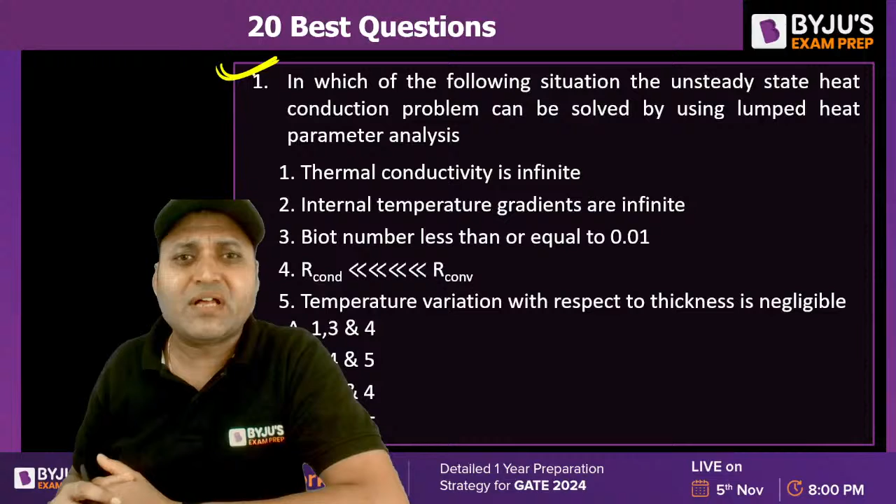All right, so there is the first question on the screen. Can you just let me know the answer to this question? In which of the following situations can the unsteady state heat conduction problem be solved by using the lumped heat parameter analysis? When can we assume the unsteady state heat conduction as a lumped system?

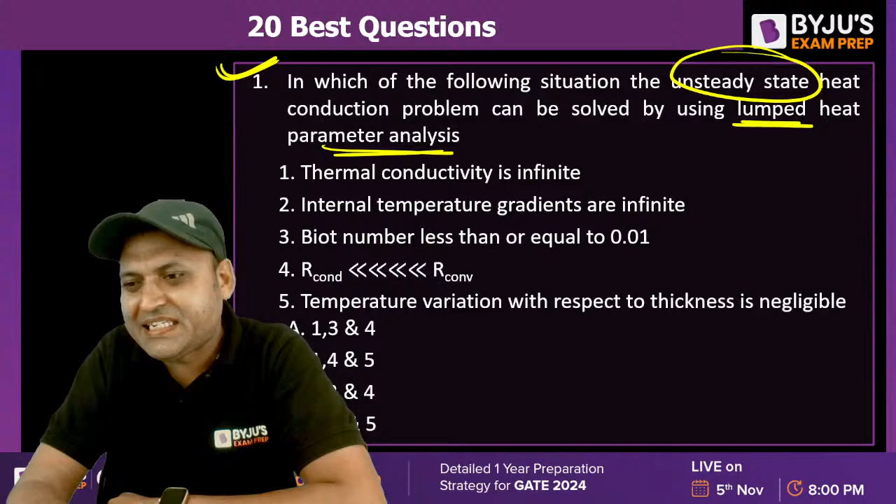So there are 5 statements. Which of the following statements are correct? Thermal conductivity is infinite. For the lumped system to be valid, K is infinite and H is finite. Very true, isn't it? Statement 1 is correct. K is infinite and H is finite.

What about the internal temperature gradients are infinite? That is incorrect, because dT by dx must be 0. Temperature should not be a function of space. Only then, what is the meaning of lumped analysis? Temperature is a function of time only. Temperature is not a function of space. So if the temperature is independent of space, the temperature gradient must be 0.

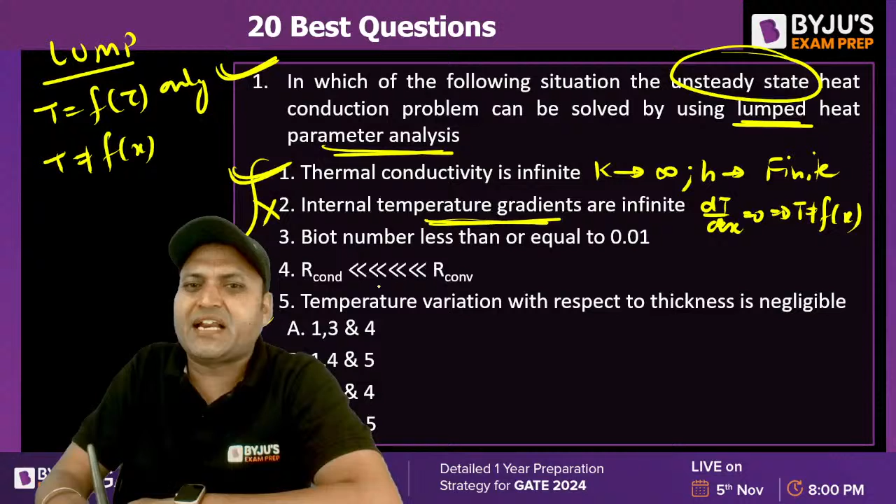So 2 is incorrect. Biot number should be less than or equal to 0.01. To be more specific, R conduction is less than or equal to 1/10 of the convective thermal resistance. So the Biot number should be less than 0.1, not 0.01. So statement 3 is also incorrect.

What about 4? Conductive thermal resistance should be less than the convective thermal resistance. 4 is correct. The temperature variation with respect to the thickness is negligible. Yes, temperature is not a function of X. 5th is also correct. So 1, 4, 5 are the correct answer.

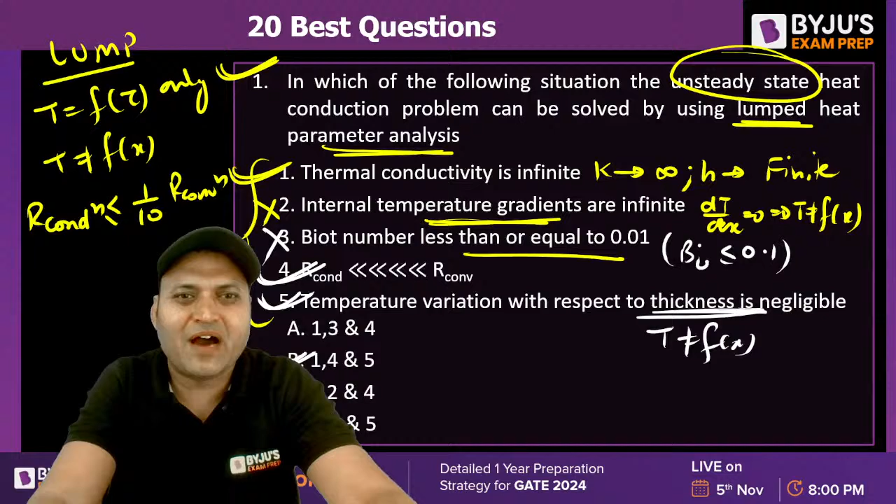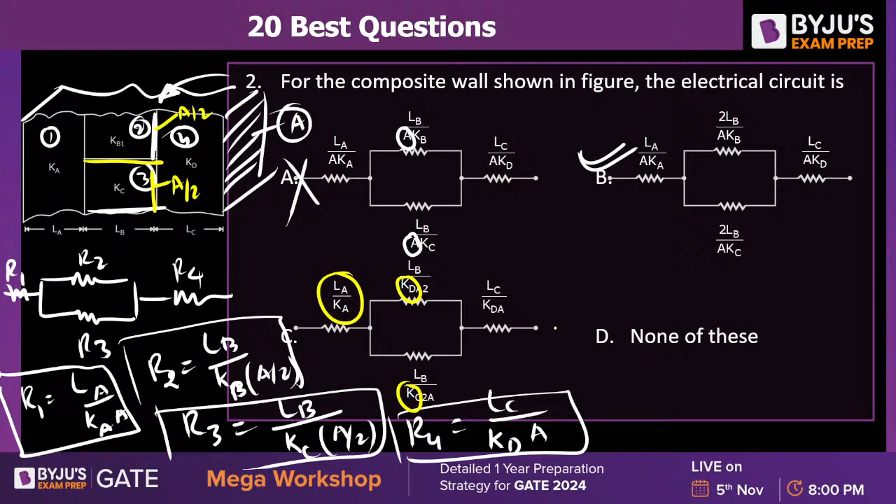If we see option C, L by K is not the thermal resistance. Area is missing. And here the thermal conductivity is not correct. KD will not be there. So option B is the right answer.

What about the next question? The Nusselt number is related to the Reynolds number in laminar and turbulent flow respectively. For external flow, what is external flow? Flow over a surface, flow over a flat plate. External flow can be divided into two types. External flow is analyzed by boundary layer theory. For laminar boundary layer, Reynolds number should be less than 5 into 10 to the power 5.

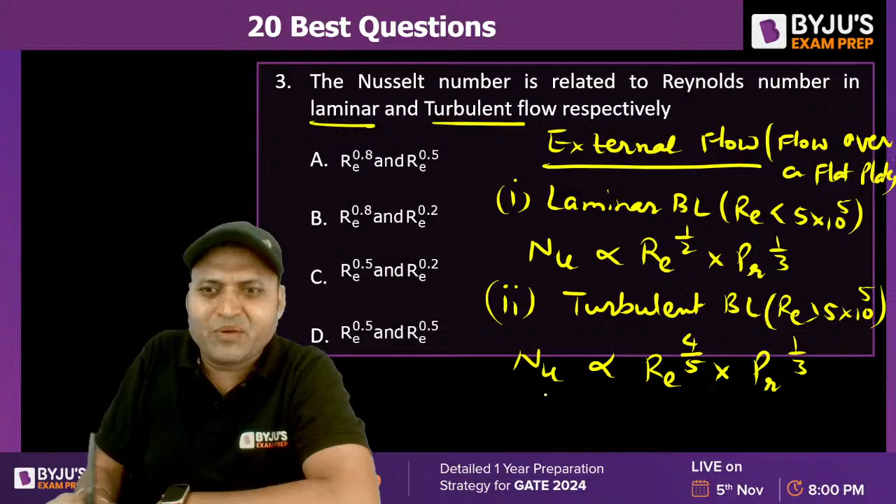In that case, Nusselt number is directly proportional to Reynolds number to the power 1/2 into Prandtl number to the power 1/3. And for turbulent boundary layer or turbulent flow, when the Reynolds number is greater than 5 into 10 to the power 5, Nusselt number is proportional to Reynolds number to the power 4/5 into Prandtl number to the power 1/3. So the question is about the variation of Nusselt number with Reynolds number. What is the right answer?

Tell me. Reynolds number to the power 0.5 for laminar boundary layer and Reynolds number to the power 0.8. 0.5 and 0.8. No option is correct. I think there is a mistake. It should be 0.8 here. 0.5 and 0.8. Which is the correct answer? What is the answer? Option D. D will be the answer. D is the correct answer.

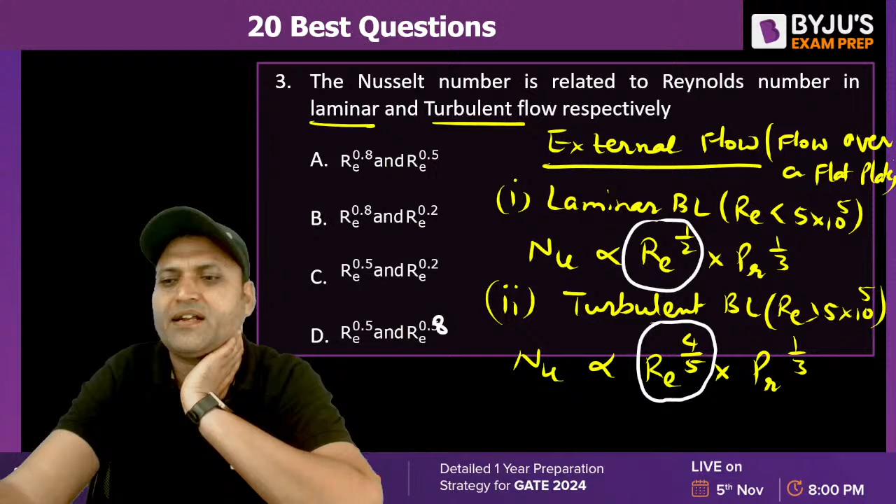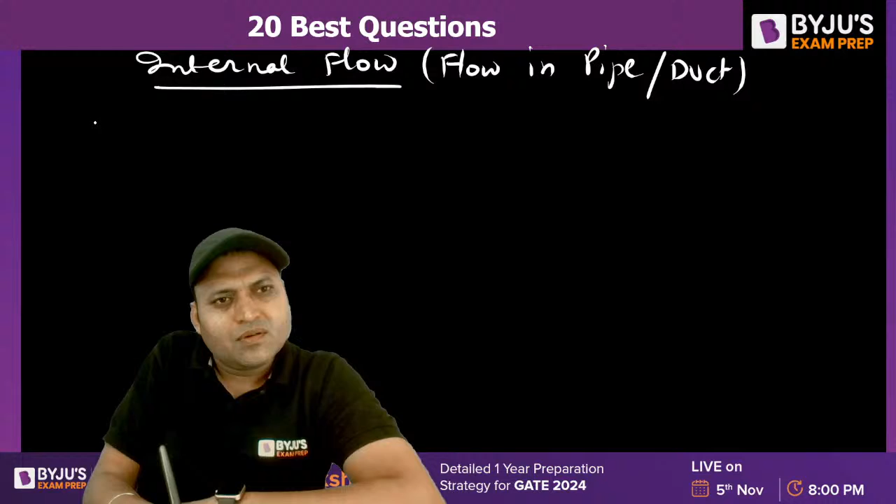If the flow would have been internal, for internal flow in a pipe or a duct, it can be divided as laminar or turbulent. For laminar flow, Nusselt number, that is h into dH by kf, is equal to constant. The value of constant can be 4.36 or 3.66. If heat flux is constant, it will be 4.36. And if the surface temperature is constant, then it will be 3.66.

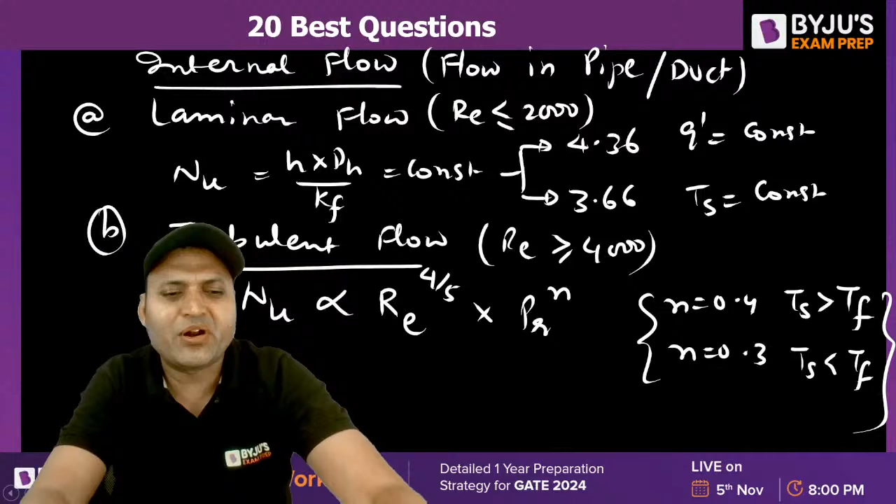Laminar flow is when the Reynolds number is less than 2000. For turbulent flow, Reynolds number should be greater than 4000. So the Nusselt number is proportional to Reynolds number to the power 4 by 5 into Prandtl number to the power n, and n is equal to 0.4 if Ts is greater than fluid temperature, n is equal to 0.3 if Ts is less than fluid temperature. These are the formulas you need to memorize for internal flow. All right.

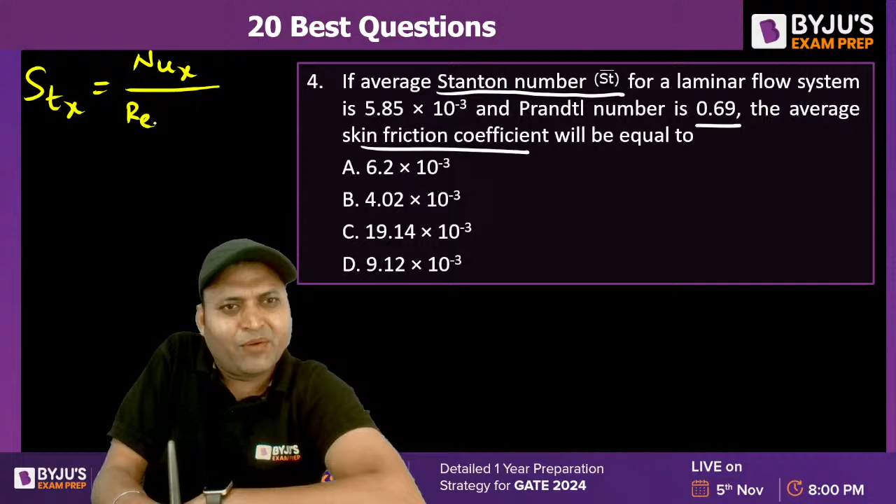The next question, question number 4. If average Stanton number for a laminar flow system is given by this, and the Prandtl number is 0.69, the average skin friction coefficient will be equal to? What is Stanton number? Local Stanton number is local Nusselt number divided by local Reynolds number into Prandtl number. For laminar boundary layer, when the Reynolds number is less than 5 into 10 to the power 5, Nusselt number is given by 0.332 into Reynolds number to the power 1 by 2 into Prandtl number to the power 1 by 3. That is the exact expression.

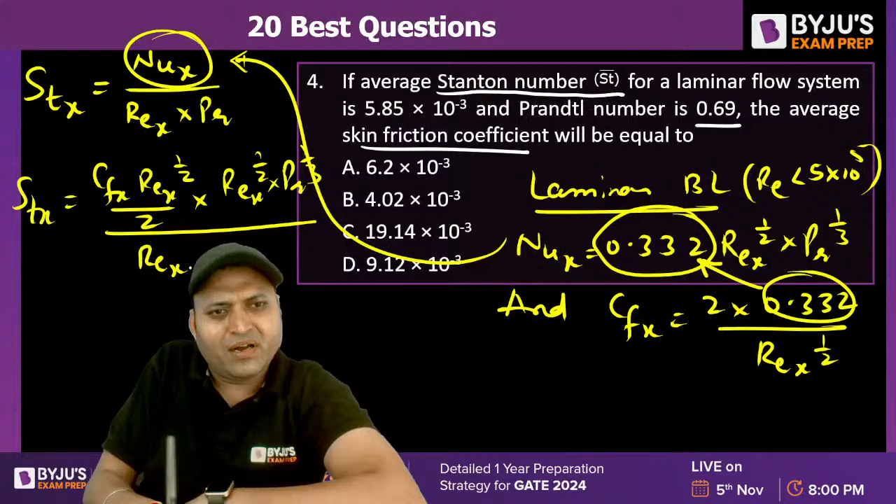And CFx is equal to twice of 0.332 upon Reynolds number to the power 1 by 2. These are the formulas. So if we put the value of Nusselt number from here, then the Stanton number is given by, in place of 0.332, write CFx into Reynolds number to the power 1 by 2 by 2, into Reynolds number to the power 1 by 2 into Prandtl number to the power 1 by 3, upon Reynolds number into Prandtl number. So this Reynolds number to the power 1 by 2 gets cancelled out with the Reynolds number.

So Stanton number is equal to CFx by 2 into Prandtl number to the power minus 2 by 3, or CFx is equal to twice of Stanton number into Prandtl number to the power 2 by 3. This will be the expression. If we want average, we will take Stanton number as average. So it will be 2 into Stanton number average into Prandtl number to the power 2 by 3. That will give you the skin friction coefficient. Can you solve it and do let me know?

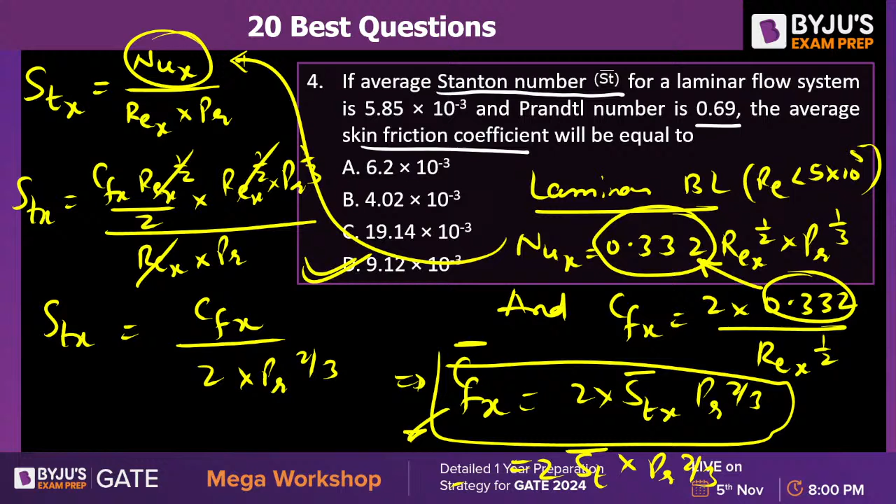What is the answer? Put the values and find out the answer. Isn't it option D? Are you guys getting option D or not? The next one, question number 5. There are 20 questions in total. Try to solve the next one.

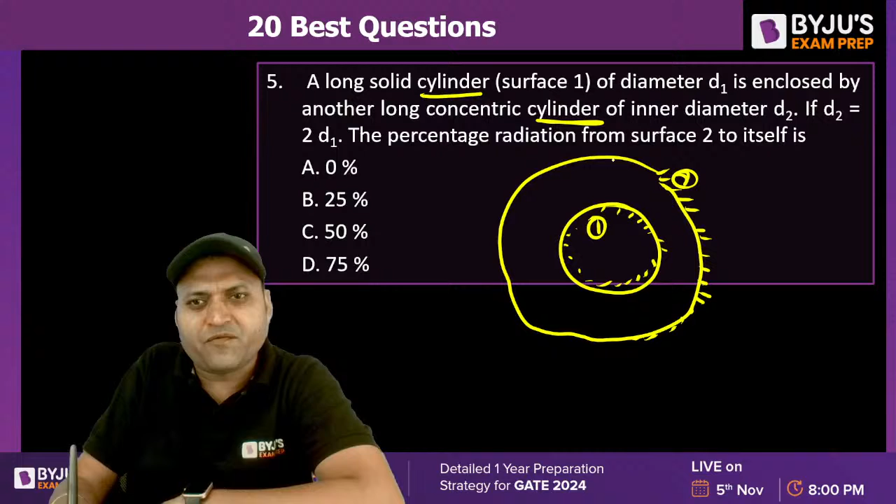A long solid cylinder, surface 1 of diameter D1, is enclosed by another long cylinder. The question is from the radiation shape factor. There is a cylinder inside and another cylinder outside. Let us say it is an enclosure. They are a cylindrical system, concentric cylinders. If D2 is equal to twice of D1, the percent radiation from surface 2 to itself, F22, will be how much?

So from the enclosure theorem, we can say F22 is equal to 1 minus F21, and from the reciprocity theorem, we can write F21 is A1 by A2 into F12. Now we need to find out F12. Also F11 plus F12 is equal to 1 from the enclosure theorem.

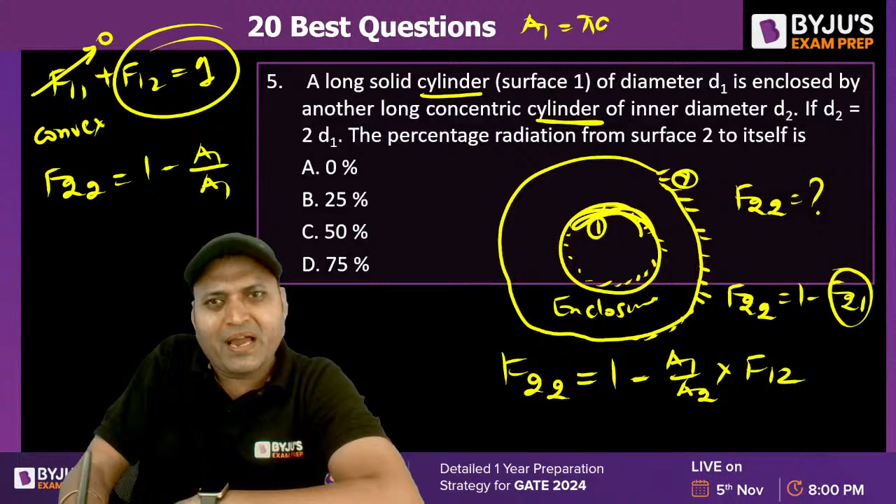Self-shape factor of a convex surface is equal to 0. 1 is the convex surface. For a convex surface, F12 is equal to 1. So F22 will be equal to 1 minus A1 by A2. And what are A1 and A2? A1 is equal to pi into D1L. A2 is equal to pi into D2L. So it will be 1 minus D1 by D2, which will give you the answer 50%. 50% will be the answer, isn't it?

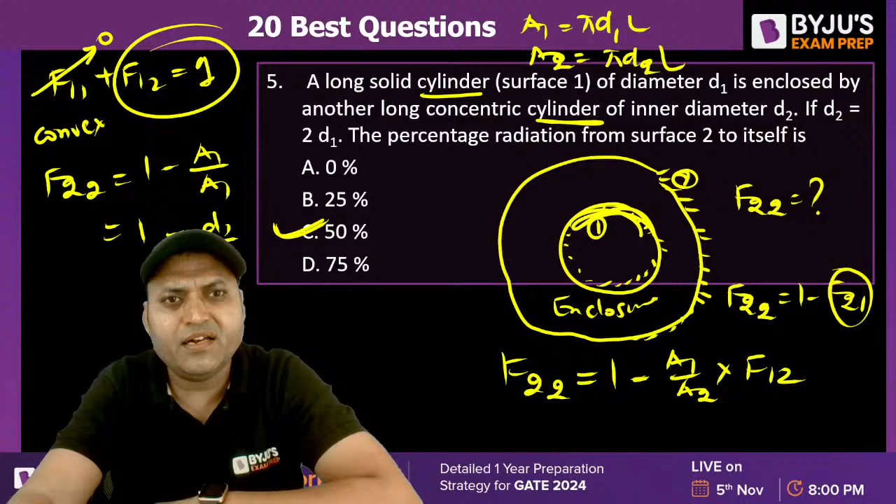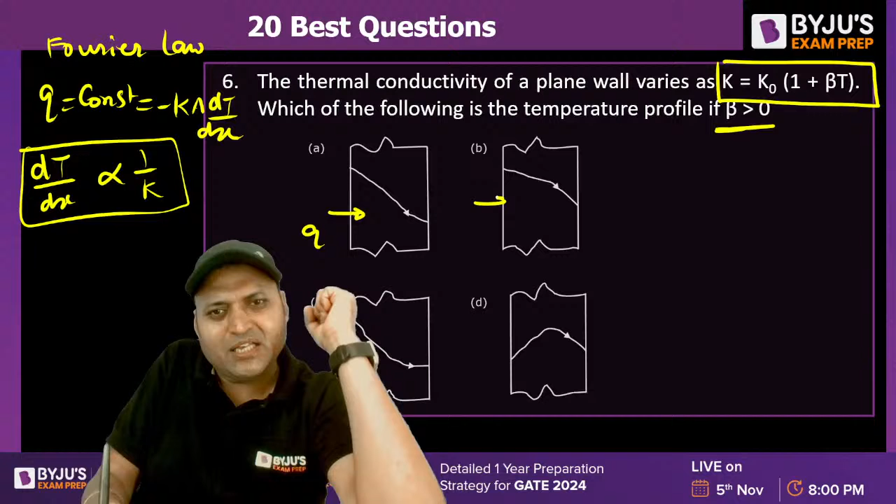And the heat flow is taking place from left to right. Then as x increases, the temperature must decrease, isn't it? And if we use this expression, if beta is positive, then K will also decrease. And if K decreases, dT by dx must increase in the direction of heat flow, and the nature will be negative. So the curve which represents the negative and increasing slope will be the correct answer for the temperature profile, isn't it? So B is the correct answer.

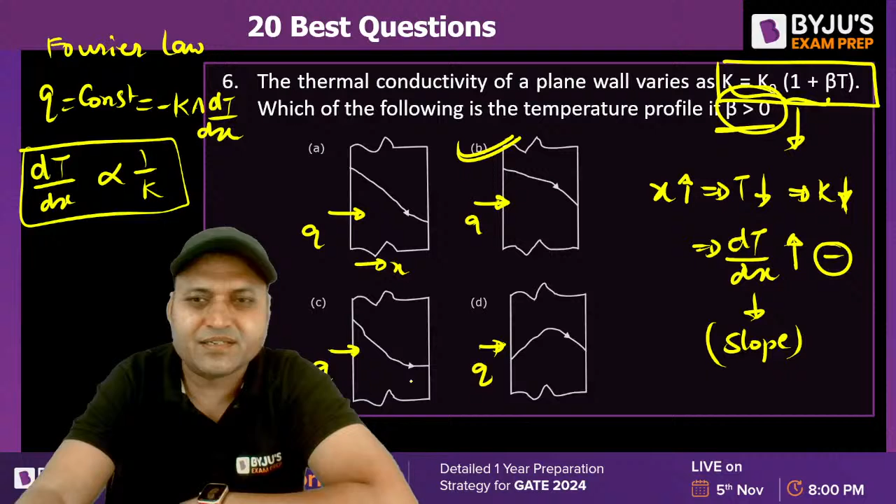So if we draw the temperature profile for a plane wall having constant heat transfer rate and constant temperature difference delta T, then there will be three curves shown. The temperature profile will be linear for constant thermal conductivity, that is, if we take the average thermal conductivity into consideration. The temperature profile will be given by this curve when K is equal to K naught (1 plus beta T), when beta is positive. That happens for gas and insulator: as the temperature increases, the thermal conductivity increases.

And the curve will be given by this graph when K is K naught (1 minus beta T). Again, beta is greater than 0. So this will be valid for liquid and conductor. These are the temperature profiles because dT by dx is always inversely proportional to K. The curve will be developed by using this expression.

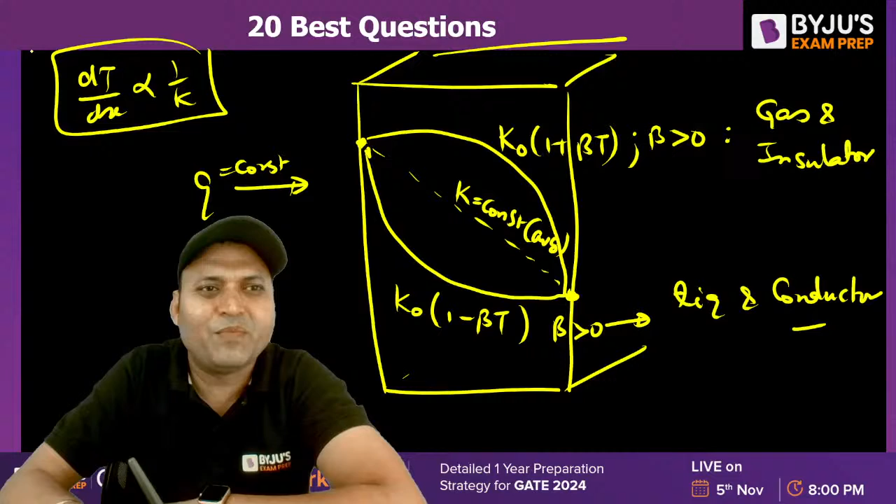Question number 7. A steam condenser. What is a condenser? It means hot fluid is undergoing a phase change. The temperature of the hot fluid remains constant. Condensing steam at 70 degrees Celsius, so the hot fluid temperature TH is 70 degrees Celsius and the temperature profile will be a horizontal line, to have a capacity of 100 kilowatt, that is Q. Water, the cold fluid, at 20 degrees Celsius is used and outlet temperature is limited to 45 degrees Celsius.

If the overall heat transfer coefficient U is 3100, the surface area required is, the question is about A. Assume water heat capacity as minimum. It will definitely be minimum because if there is a phase change, the heat capacity rate for the hot fluid is taken as infinite. Assume the water heat capacity as minimum and use NTU method. In an objective paper, whatever you are comfortable with, you can use if the parameters are sufficient. So first, let us use LMTD approach.

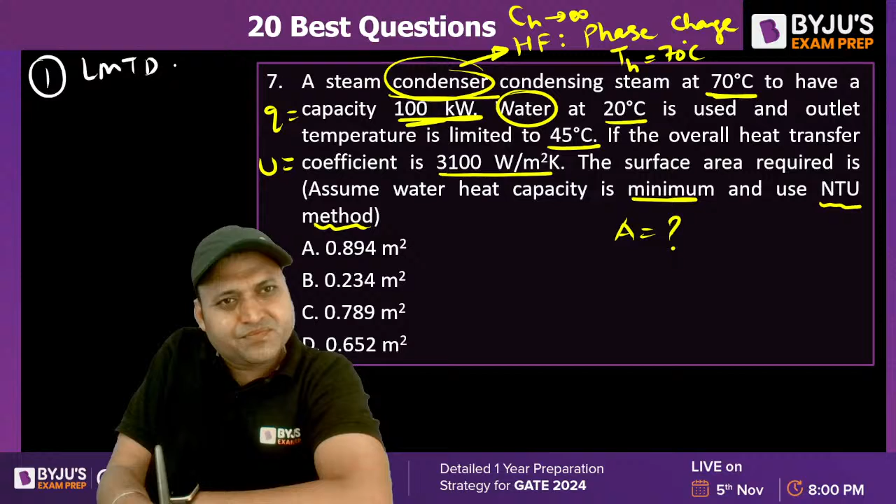And we will check whether we get the same answer or not. So for LMTD, we need to find out the LMTD. You can either use the parallel flow or counter flow heat exchanger; it does not matter at all. The hot fluid temperature remains 70. The cold fluid entry temperature is 20 and the leaving temperature is 45. What is the value of LMTD? This is delta T1. This is delta T2. I want everyone to solve for LMTD first.

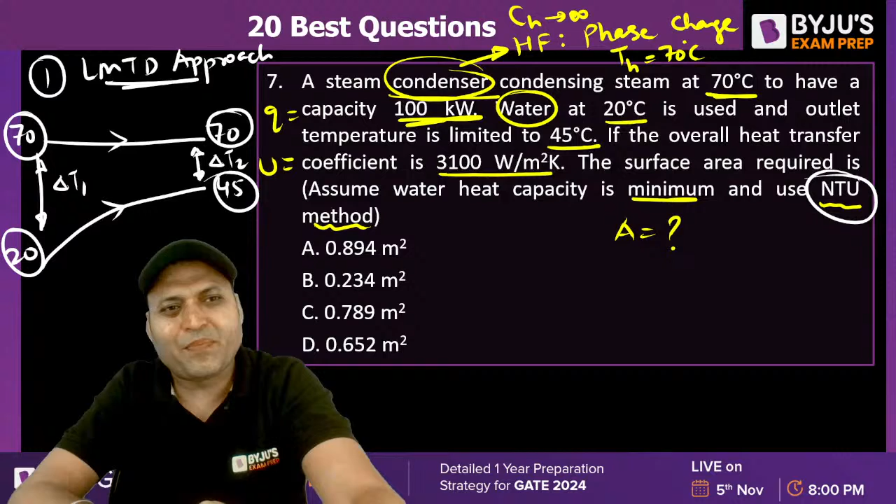I am using the LMTD approach even though it is mentioned to use the NTU approach, because I feel LMTD approach is a little simpler. If all the terminal temperatures are given, as in this question, then we can go with the LMTD approach, isn't it? If any of the temperatures had been missing, then we should have used the other approach. LMTD is delta T1 minus delta T2 upon natural log of delta T1 by delta T2.

Can you find out what is delta T1? 70 minus 20, that is 50, minus what is delta T2? That is 25, upon natural log of 50 by 25. That will give you LMTD. So delta Tm, mean temperature difference between hot fluid and cold fluid, is, what is delta Tm?

Question number 7. What is delta Tm? I think delta Tm should be 36.06 degrees Celsius. Once you get delta Tm, then Q is equal to U into A into delta Tm. So A will be equal to Q upon, what is the heat transfer rate? 100 kilowatt, 100 into 10 to the power 3 upon U. U is 3100 into delta Tm 36.06.

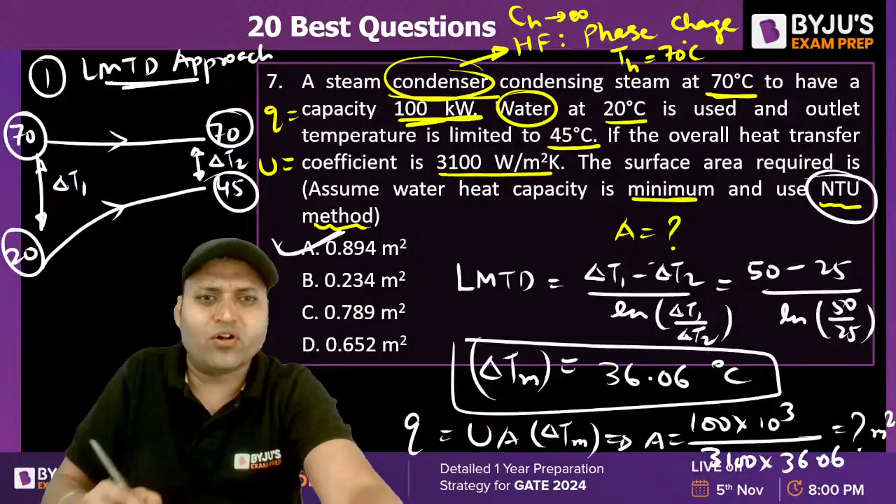Do solve it, you will get area in meter square. What will be the area in meter square? Are you getting option A? Are you guys getting option A or not? Isn't it option A? That is one approach.

If you use the effectiveness NTU approach to find out the area, effectiveness is given by Q upon Q maximum, that is equal to Q upon C minimum into TH1 minus TC1, isn't it?

So Q is already given to you. What is Q? 100 kilowatt. So it will be 100 into 10 to the... CC is not given. Is it given? CC is not given. So what you can do is, because the heat capacity rate for the cold fluid is not given in the question, Q could have been written as CC into TC2 minus TC1. This could have got cancelled out.

That is 45 minus 20 upon TH1, that is 70 minus 20. 45 minus 20 upon 70 minus 20. That is the effectiveness. What is the value for the effectiveness? 0.5. And then because it is a condenser, when there is a phase change, effectiveness is given by 1 minus e to the power minus NTU. So NTU can be calculated from here.

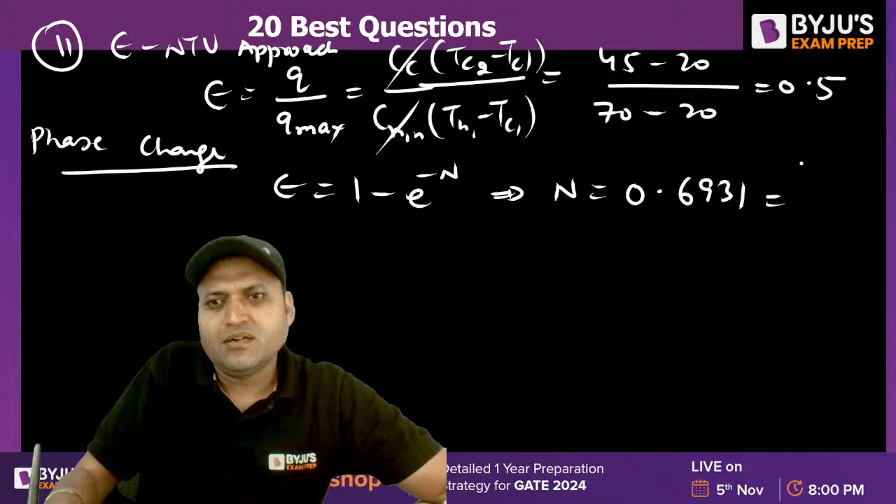Can you find out the value of NTU? NTU will come out to be 0.6931. That is UA by C minimum. Again we require C minimum. That is CC. You could have calculated CC from here. What is CC? Q is equal to CC into TC2 minus TC1.

Q is equal to 100 into 10 to the power 3 is equal to heat capacity rate for the cold fluid into TC2 minus TC1. TC2 is 45 minus 20. Find out the value of CC. That is equal to 4000 watt per Kelvin. That is C minimum. So area will be given by NTU into C minimum upon U. NTU is 0.6931 into C minimum 4000 upon overall heat transfer coefficient, already given as 3100.

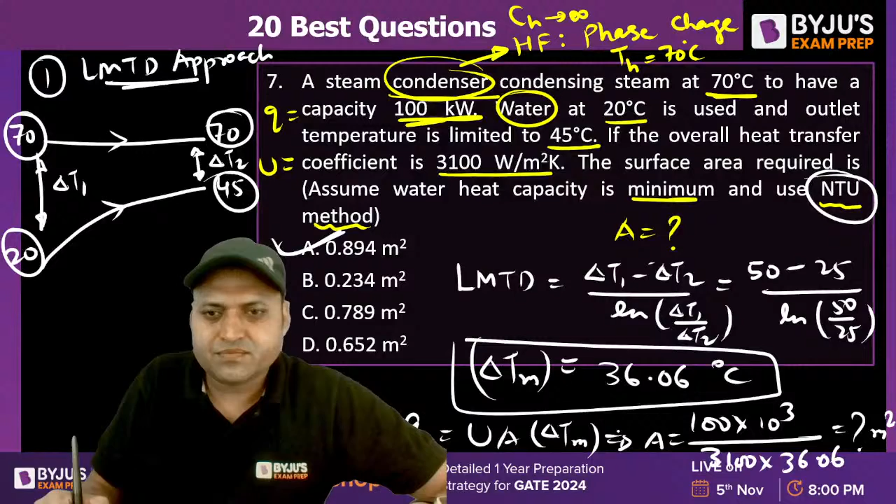That will be the answer in meter square. If you solve this way also, you will get the same result, 0.894. I hope that both the methods are clear to you. Is this clear to everyone? Let us move to the next one, question number 8.

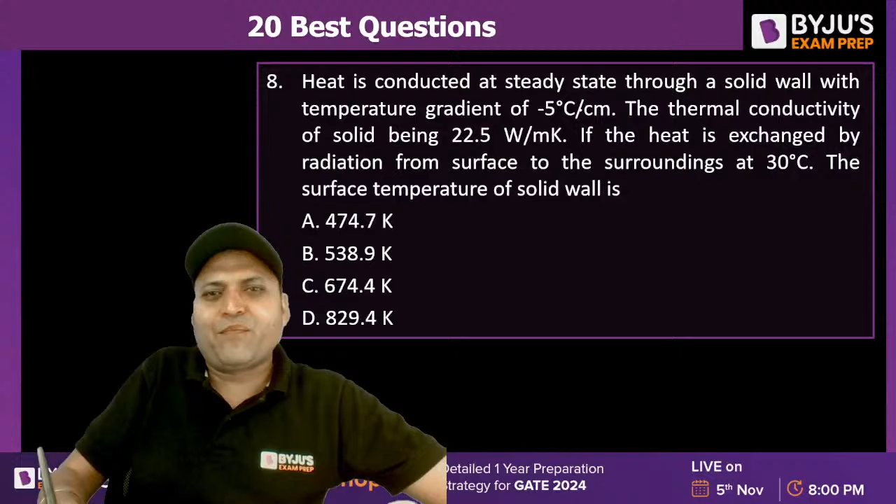Heat is conducted at a steady state through a solid wall with temperature gradient of -5 degrees Celsius per centimeter. The thermal conductivity of the solid being this, thermal conductivity K is given, dT by dx is given, which is negative.

If the heat is exchanged by radiation, there is a conduction here, and the same heat will be radiated from surface to the surrounding at 30 degrees Celsius. Then we need to find out the surface temperature Ts. So conduction should be equal to radiation. For the steady state, Q conduction should be equal to Q radiation.

What is Q conduction? Minus K into area normal to the direction of heat flow into dT by dx is equal to Q radiation, sigma into A into surface temperature to the power 4 minus T infinity to the power 4. Here we need to find out Ts, area getting cancelled out. So Ts is equal to T infinity to the power 4 plus minus K into dT by dx upon sigma, whole to the power 1 by 4. That will give you the answer.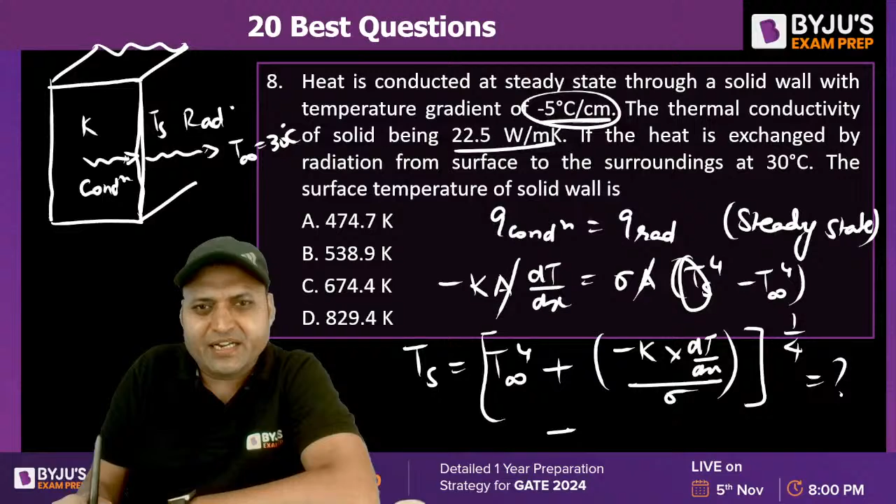Temperature has to be in Kelvin. Temperature should always be in Kelvin. That is the absolute temperature. We should always use the absolute temperatures.

What is the surface temperature of the solid? What is sigma? Sigma is 5.67 × 10^-8 watt per meter square Kelvin to the power 4. Put the values. This negative sign will get cancelled out with this. So it can be converted into Celsius per meter. And if you do the calculation, the answer to question number 8 should come out to be 674.4. Please do the calculation.

T infinity will be equal to 30 plus 273 Kelvin. So put the values. 303 to the power 4 plus... Can you do the calculation and find the answer? Is your answer matching or not? Thermal conductivity is 22.5. dT by dx is 500 degrees Celsius per meter.

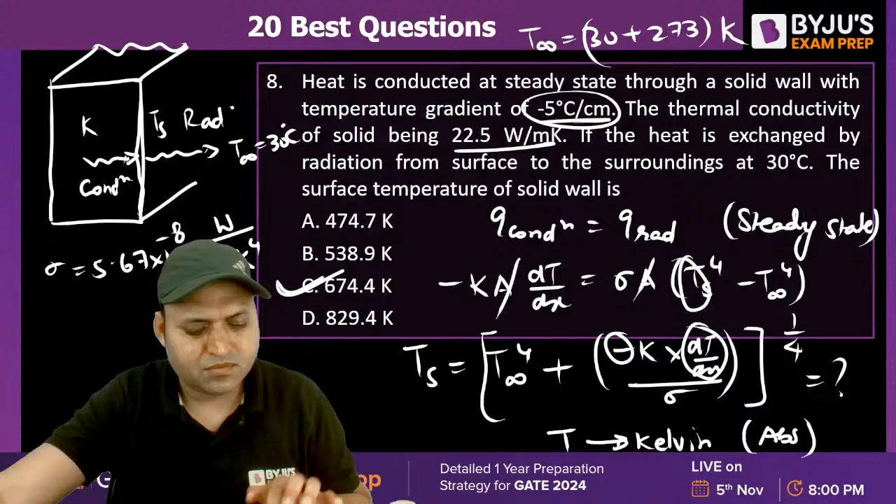Plus 303 to the power 4, to the power 1 by 4, that is 0.25. 674.38 will be the answer. C is the correct answer. These will be the expressions to be used.

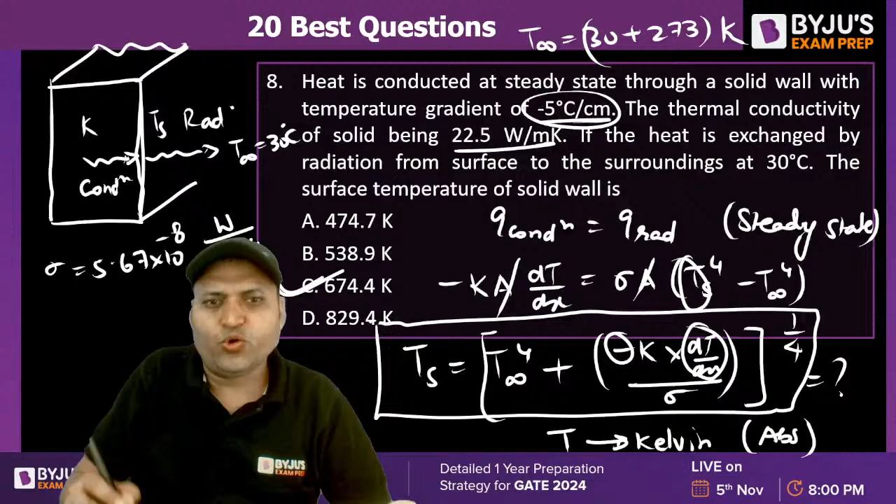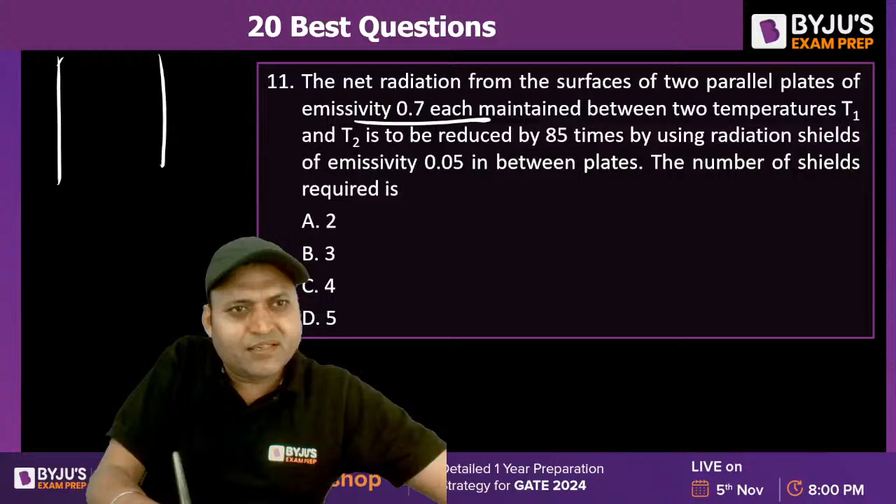The next question, number 11. The net radiation from the surfaces of two parallel plates of emissivity 0.7 each. There are two parallel plates. F12 is equal to 1, isn't it? Because F11 is 0. Epsilon 1 is equal to epsilon 2 is equal to 0.7. Maintained between two temperatures T1 and T2, it is to be reduced by 85 times by using radiation shields of emissivity 0.05 in between the plates.

If there are shields placed having the emissivity 0.05, the number of shields required is? We need to reduce by 85 times. So Q1 is without shields and Q2 is with shields, let me assume. So according to the given question, Q1 by Q2 is equal to 85. Q1 is more than Q2. So Q2 becomes Q1 by 85. That is the given question.

And what is Q1 by Q2? That is thermal resistance 2 upon thermal resistance 1, isn't it? Because Q is inversely proportional to thermal resistance for the same temperature, for the same thermal potential. So if we want to write RTH2 upon RTH1, then we will write Q1 by Q2, that is 85, is equal to, what is the thermal resistance 2?

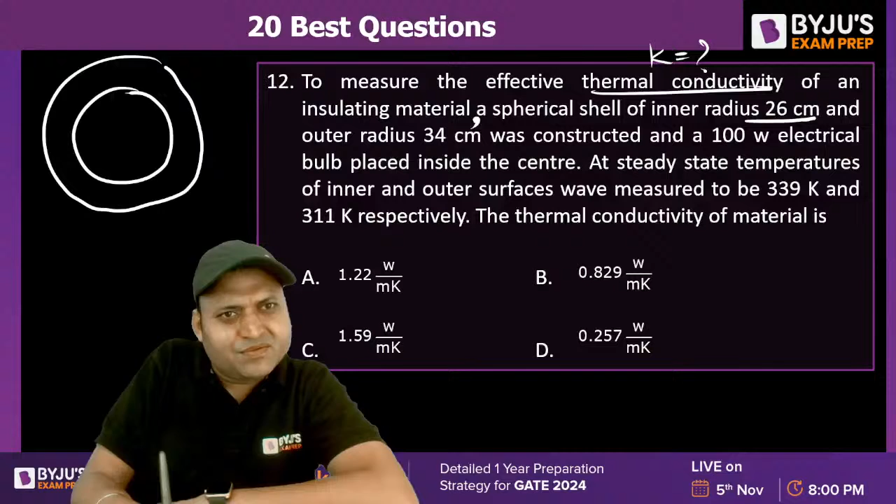The next question, to measure the effective thermal conductivity of an insulating material, K needs to be calculated. A spherical shell, it means a hollow sphere, of inner radius R1 equal to 26 centimeter, that is 0.26 meter, and outer radius R2 equal to 34 centimeter, that is 0.34 meter, was constructed, and a 100-watt electric bulb is placed inside the center.

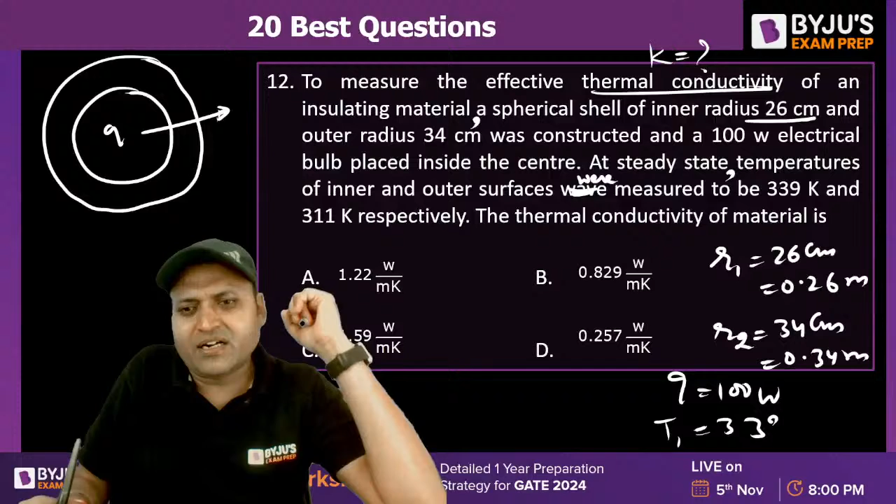So Q is equal to 100 watt. The heat will flow radially outward. At steady state, temperatures of inner and outer surface were measured to be T1 equal to 339 Kelvin and T2 equal to 311 Kelvin respectively. What is the thermal conductivity of the material? It is simply the question from the hollow sphere.

So Q is given by 4 pi K R1 R2 delta T upon R2 minus R1. We can find out the value of K from here. K is equal to Q, that is 100, into R2 minus R1, that is 34 minus 26, 0.08, upon 4 pi into R1, that is 0.26, into R2, 0.34, into delta T, that is 339 minus 311. Do the calculation, you will get the value of thermal conductivity.

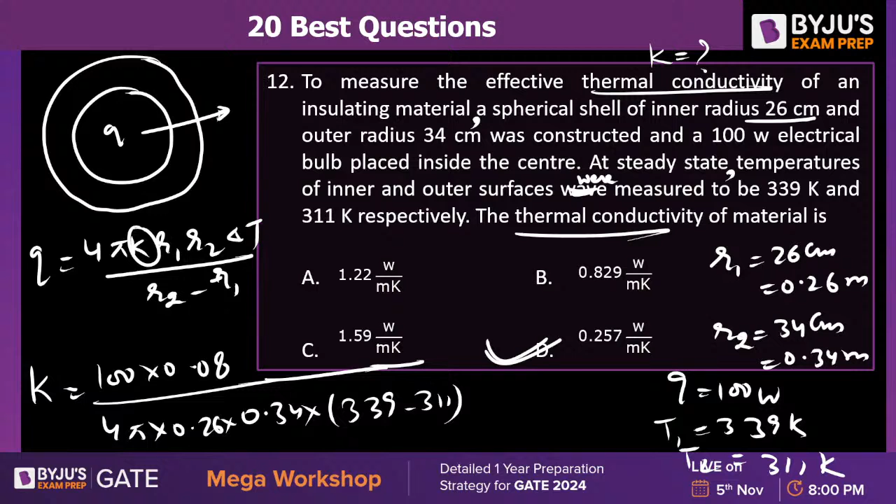What will be the thermal conductivity? Question number 12. Are you getting option D or not? 0.257. Are you guys getting option D or not? 100 into 0.08, that is 8, divided by 4 pi into 0.26 into 0.34. What is 339 minus 311? That is 28. It is not coming correct. How much is the answer? Q, that is 100.

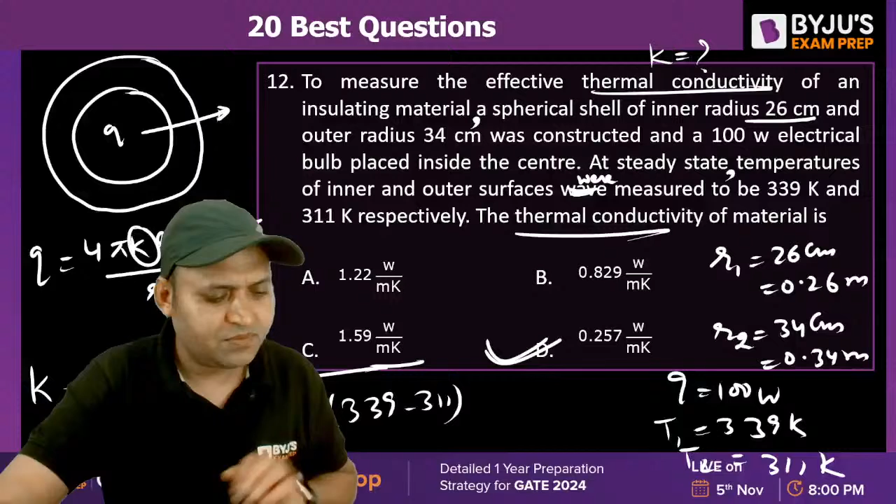Four pi, 0.34 into 0.26 into 28. 0.257. Yes. Question number 13. The next one.

A heat flux Q is 6000 watt per meter square at the surfaces of an electrical heater. The heater temperature is 120 degrees Celsius, where it is cooled by air at 70 degrees Celsius. This is the electrical heater. 70°C is the fluid air temperature, and the heater temperature is 120°C.

If the power required is such that Q becomes 2000, then the new heater temperature will be Ts new. The question is very simple. The mode of heat transfer will be convection from the heater surface to the air. So Q is given by HA into delta T. H will remain constant because there is no change in the fluid. So Q will be directly proportional to delta T.

So Q2 upon Q1 is equal to delta T2 by delta T1. Delta T2 is Ts2 minus 70 upon 120 minus 70, and Q2 by Q1 is 2000 by 6000. Equate these two, you will find out Ts2. What is the answer for Ts2? Question number 13. Option C, isn't it? 1 by 3 into 50, 50 by 3. 16.66 plus 70. 86.66 is the answer. C will be the answer.

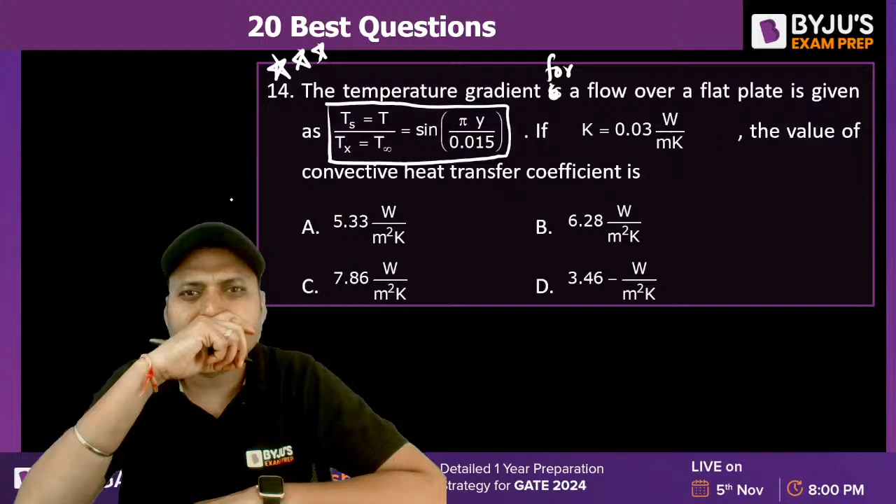The next one, question number 14. The temperature gradient for a flow over a flat plate is given by this expression. It is actually the temperature profile. The temperature profile for flow over a flat plate is given as this. If the thermal conductivity of the fluid is 0.03 watt per meter Kelvin, the value of convective heat transfer coefficient H is? So how to solve for H?

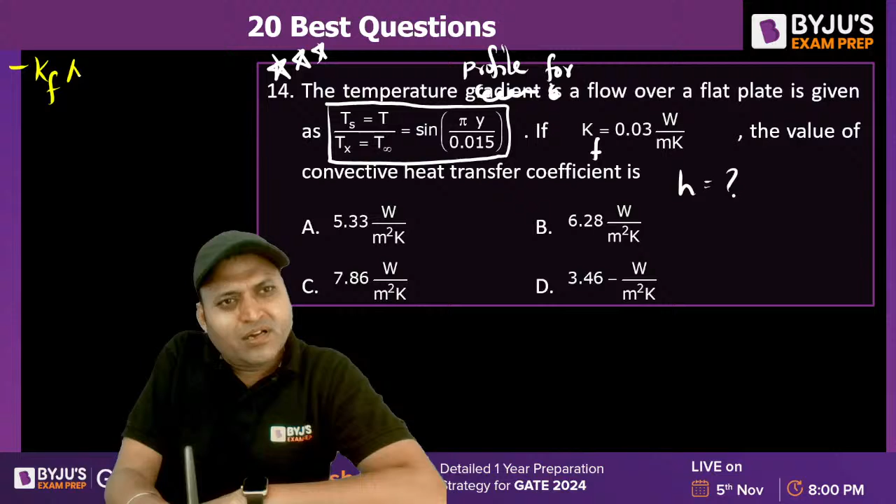In no slip region, there will be conduction. So Q conduction is equal to Q convection. So we can say minus K of fluid into A into dT by dy at the interface, y is equal to 0, is equal to H into A into delta T, that is Ts minus T infinity. Area gets cancelled out. From here we can find out H.

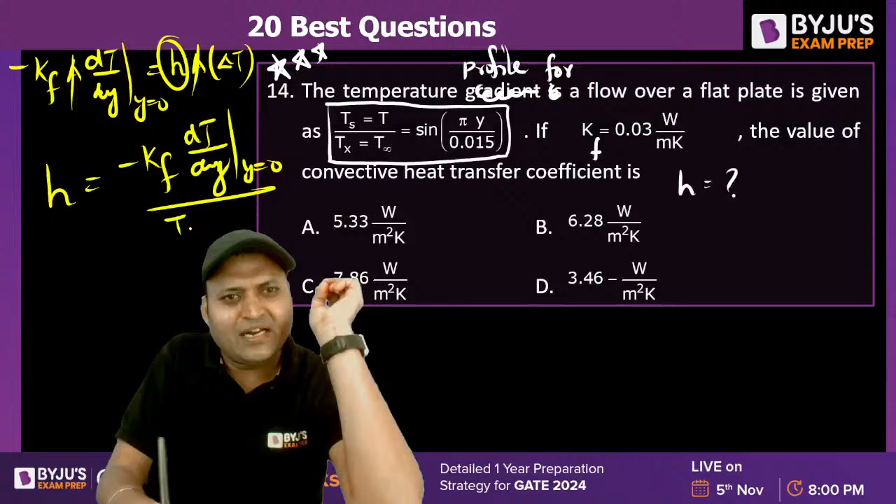What is the formula for H? H will be minus thermal conductivity of fluid into dT by dy at y is equal to 0 upon delta T, that is Ts minus T infinity. We need to find out dT by dy at y is equal to 0. So if you do the differentiation, what is dT by dy? It should not be x, it should be s. It is Ts minus T upon Ts minus T infinity.

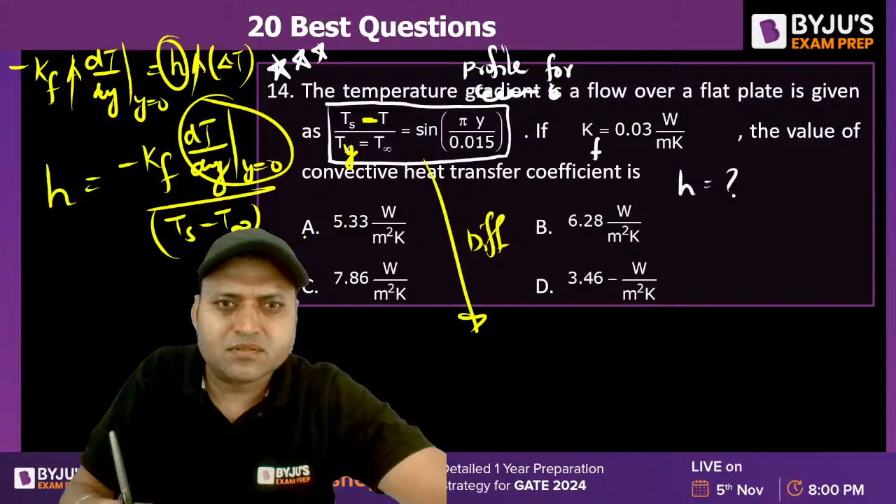Sorry. This is the expression. Ts minus T upon Ts minus T infinity is given by sin pi y upon 0.015. So can you find out dT by dy at y is equal to 0? Do the differentiation. It will be minus Ts minus T infinity. What is the differentiation of sin theta? That is cos theta. So it will be pi upon 0.015 into cos of pi y upon 0.015.

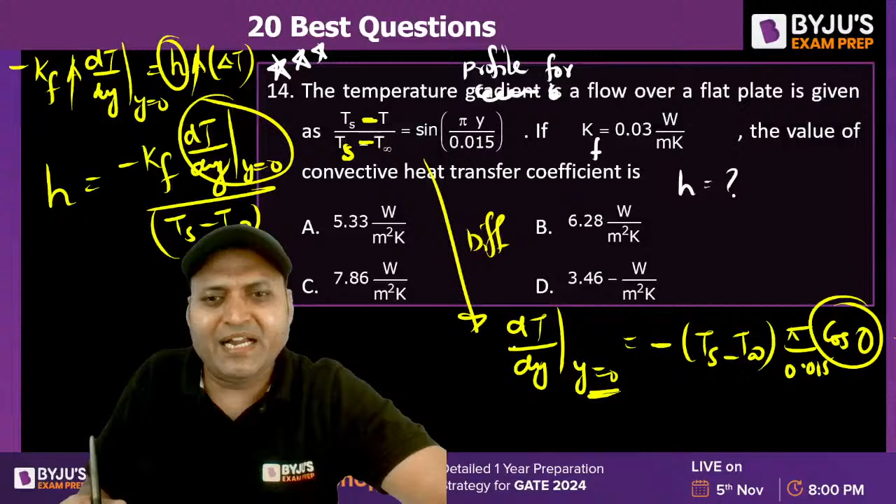For y is equal to 0, it will be cos 0. What is cos 0? That is equal to 1. So we have dT by dy at y is equal to 0. If you put the values, H will be equal to minus thermal conductivity 0.03, and the minus will get cancelled out, because this is also having a negative sign. So it will be Ts minus T infinity into pi upon 0.015 upon Ts minus T infinity. These two will get cancelled out. Put the value and solve for H.

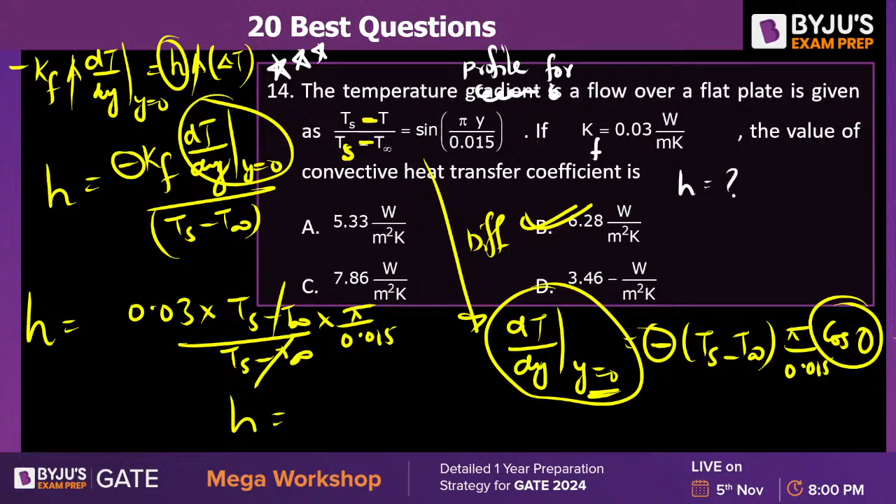0.03 into pi divided by 0.015. 6.28 will be the answer. Option B is the correct answer. For question number 14, option B, 6.28 will be the answer. Isn't it?

Question number 15. A vertical surface 5 meter high is at 80 degrees Celsius and is surrounded by air at 20 degrees Celsius. This is T infinity. This is Ts. The value of average heat transfer coefficient at a location where Grashof number is 10 to the power 8 is 48.3. Find the average heat transfer coefficient at a location where the Grashof number is 10 to the power 4. What is the value of H?

So we need to develop a relation between H and Grashof number. And because Grashof number is less than 10 to the power 9, the motion is laminar. It is for free convection, natural or free convection.

The question is from natural or free convection. If Grashof number is less than 10 to the power 9, the motion is laminar. So Nusselt number, which is h Lc by kf, is directly proportional to Grashof number into Prandtl number to the power 1 by 4. For laminar motion, it is 1 by 4. For turbulent motion, it is 1 by 3.

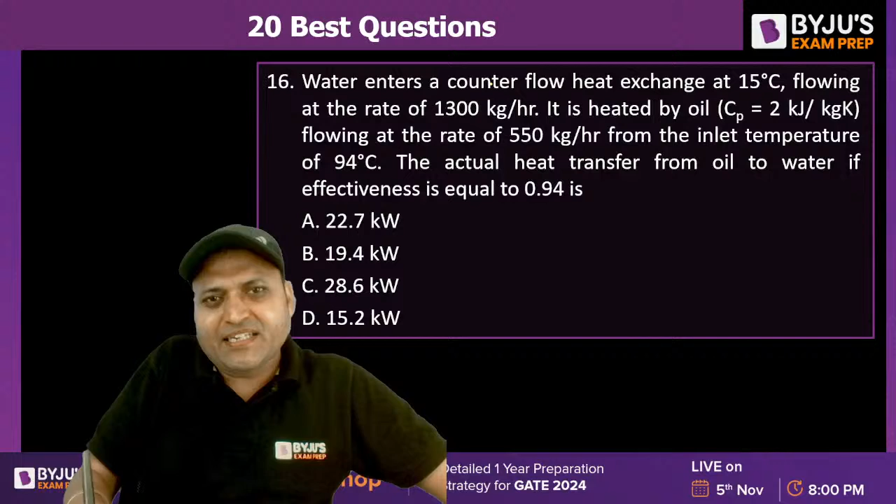Question number 16. Water enters a counterflow heat exchanger at 15 degrees Celsius, flowing at the rate of 1300 kg per hour. It is heated by oil. So water is the cold fluid which is getting heated, and oil is the hot fluid. Specific heat of oil is given, flowing at the rate of 550 kg per hour from the inlet temperature of 94 degrees Celsius. Find the actual heat transfer from oil to water if the effectiveness is 0.94.

This will be the temperature profile for the counterflow heat exchanger. Water is the cold fluid at 15 degrees Celsius initially, flowing at 1300 kg per hour, heated by oil, the hot fluid, with specific heat 2 kJ per kg Kelvin, flowing at 550 kg per hour from 94 degrees Celsius. When the inlet temperatures TH1 and TC1 are given, we can go with the effectiveness method. We need to find out Q.

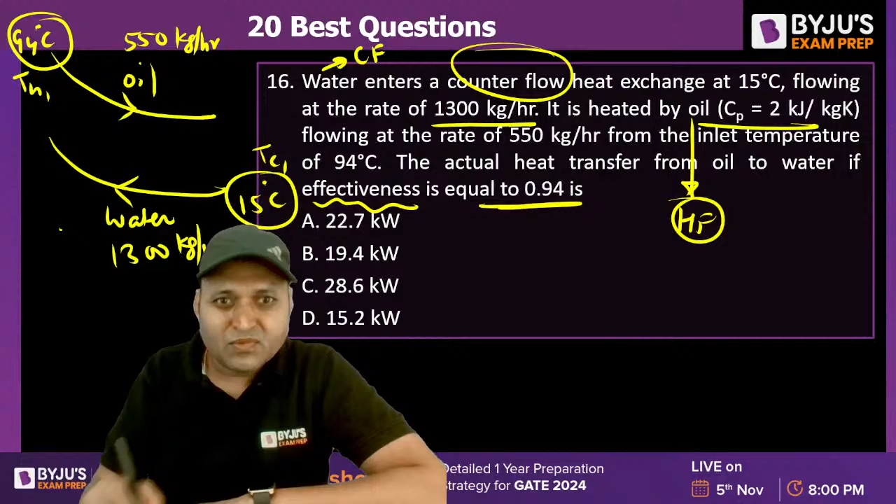Effectiveness is equal to Q upon Q maximum, so Q is effectiveness into Q maximum. Q maximum is C minimum into TH1 minus TC1. First find out C minimum. For water, specific heat is 4.18 kilojoule per kg Kelvin, and for oil it is 2 kilojoule per kg Kelvin. 4.18 into 1300 for water, so oil has the lower value: CH is C minimum.

So Q will be 0.94 multiplied by CH, the mass flow rate 550 kg per hour converted to kg per second by dividing by 3600, into specific heat 2000, into 94 minus 15. Can you solve it? 0.94 into 550 into 2000 into 94 minus 15, divided by 3600. In kilowatt, it will be 22.69. 22.7 kilowatt will be the answer.

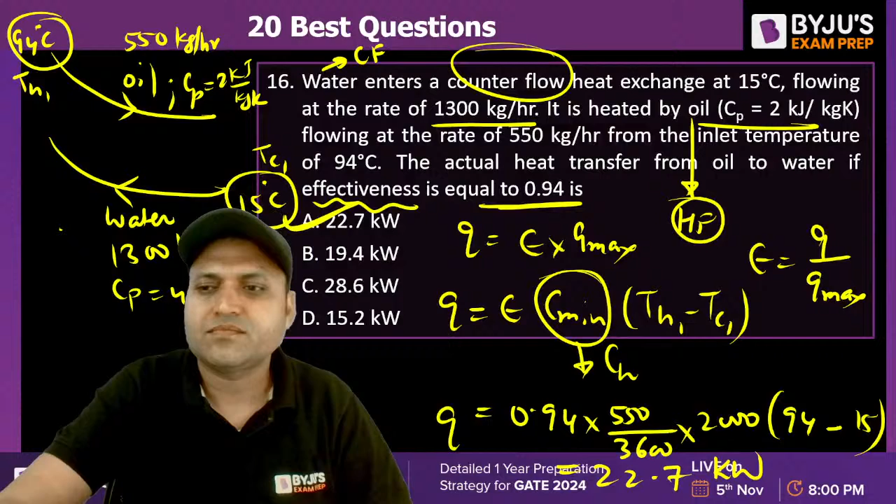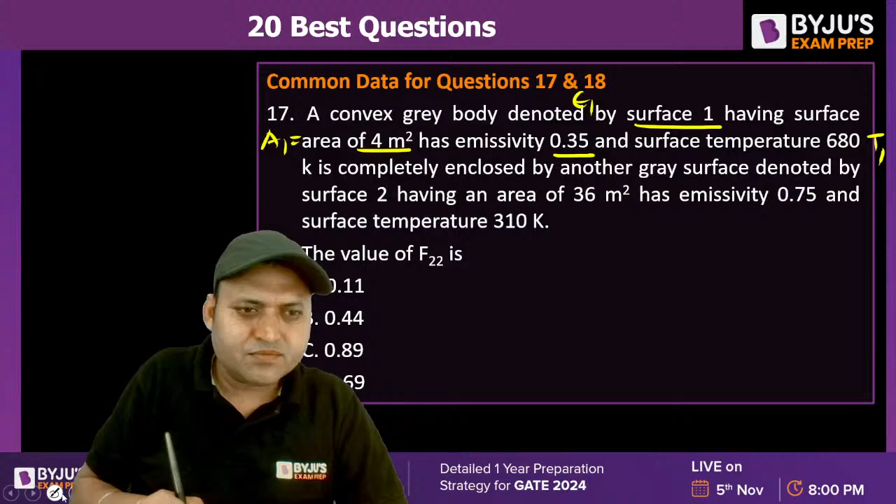17 and 18 are common data questions. A convex gray body denoted by surface 1, having surface area A1 of 4 meters square, has emissivity epsilon 1 of 0.35 and surface temperature T1 of 680 Kelvin. It is completely enclosed by another gray surface 2 having area A2, emissivity epsilon 2 and surface temperature T2.

The value of F2-2 is? It is a convex surface. F2-2 will be equal to 1 minus A1 by A2. So that is 1 minus 4 by 36, 1 minus 1 by 9, which is 8 by 9, 0.88. C will be the answer.

This is surface 1, this is surface 2. We can assume the two surfaces form an enclosure. The net heat rate Q1-2 is equal to sigma A1 into T1 to the power 4 minus T2 to the power 4, upon 1 upon F1-2 plus 1 minus epsilon 1 by epsilon 1, plus A1 by A2 into 1 minus epsilon 2 upon epsilon 2. This will be the expression.